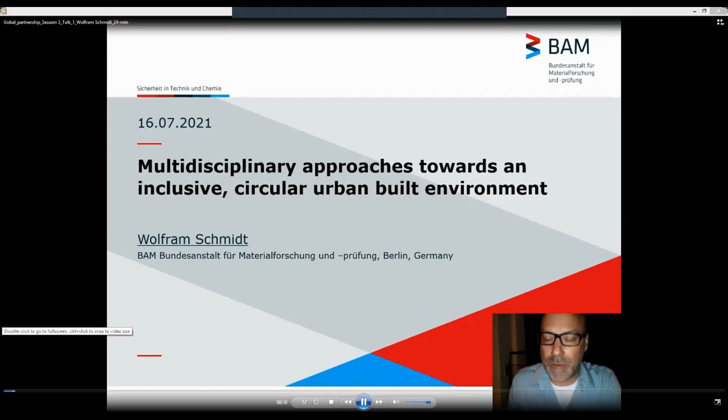Welcome everybody to this talk about multidisciplinary approaches toward an inclusive circular urban built environment. My name is Wolfram Schmidt. I work at BAM in Berlin, Germany, and I would like to thank the organizers for having me at this conference, and I would also like to apologize that I cannot be here with you live, but there was a clash of duties. I would like to encourage you to get in contact with me afterwards if you have discussion items or questions.

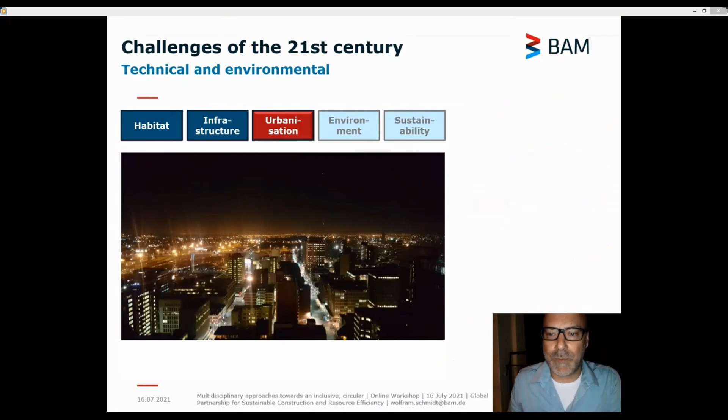Without further ado, I would like to come to the human and societal crisis that we face in the next century, which is war, hunger, health, migration. But beyond these societal challenges, we have more technical or environmental challenges like habitat, infrastructure, urbanization, environment, and sustainability. If we take a closer look at that, we can see that the construction industry has a very heavy contribution to these challenges.

The construction industry is growing, so this contribution will be bigger and bigger. And already today, according to the United Nations Environment Programme, the carbon emissions and also the energy demand of the built environment make out about 40% of the global values. And the construction industry itself contributes already with about 10% to that.

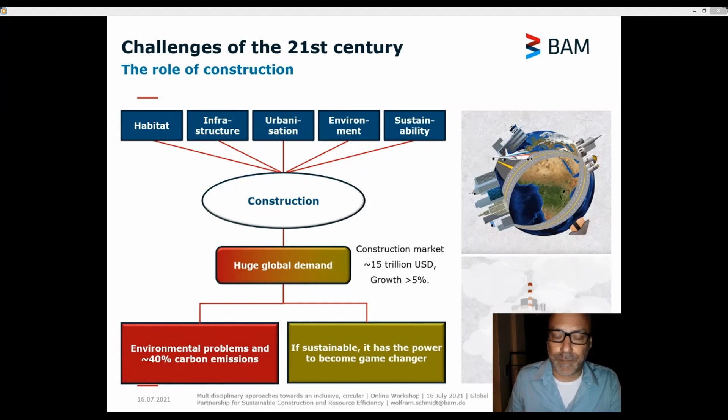But when there is such a huge global demand, we can certainly consider it as a challenge, but we can also consider it as a potential, because if we just make it more sustainable, we can create great leverage towards a betterment. The construction industry can really become a game changer if only we can create sustainable construction where the environment is protected, where more climate-friendly materials are being used, and where this also creates markets.

Because when people can use sustainable construction to create livelihoods, automatically those human and societal crises I mentioned at the beginning, like war, hunger, health, and migration, become better. And therefore urbanization and construction in general can contribute also to those more societal and human challenges we face.

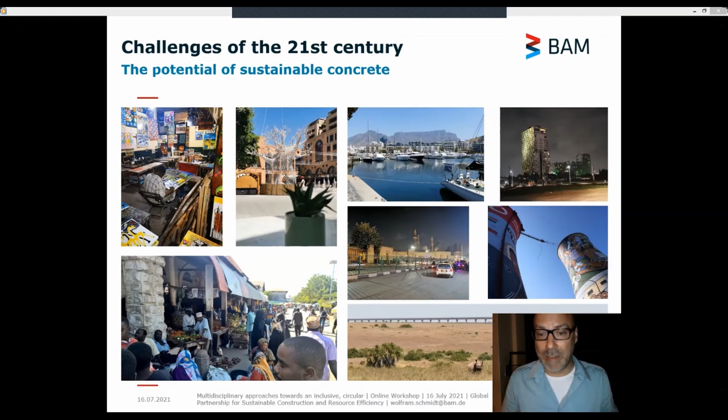That means if we build something, a construction that automatically interacts with the environment and vice versa, that is well known, but we also have to consider that construction also interacts with how societies behave, and that is also a mutual effect. Urbanization, cities, are the places where all this comes together: environment, societies, construction, and therefore urbanization processes can really become critical for the future of humanity.

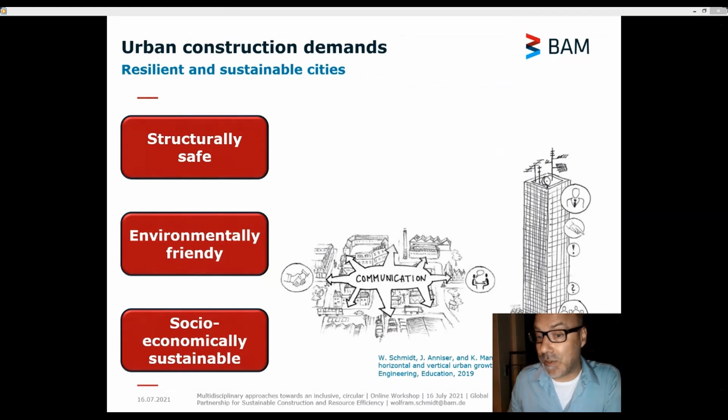We have to make sure that our future cities are not only structurally safe. We also have to make sure they are environmentally friendly, but particularly we have to also consider that they are socio-economically sustainable, that cities are built for the people who live in these cities, which is not the case today, and where we have to change our mindset. Because if we just fail one of these items, we fail to have a sustainable urban structure.

Much of how potentials and challenges can unfold in urban development depends on whether the city already exists at a high population density, or whether it is a low density region which can still develop over the course of the next decades. I'm not getting into the details of that figure—you can read it if you like in this publication—but it seems that a high density situation and a low density situation seem to be very crucial for how cities evolve in the future and how people perceive their cities.

I would like to give you that example of a workshop I did with children in a very neglected settlement in Nairobi, in a very urban environment, Mukuru. And I asked the children how they dream the city of the future, and they said they want to have more space, more green, more animals, which is really a rural environment.

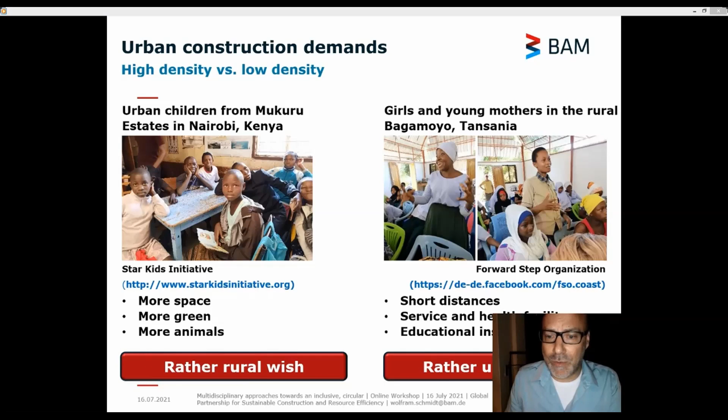And then I did the same exercise with girls and young mothers in a place which is very rural in Bagamoyo in Tanzania. Here the answers were short distances to services and health facilities, good access to educational institutions, which is rather the dream of an urban environment. So that is a very clear indicator that we really have to take care that we do not over-urbanize those already urbanized regions that exist, but rather invest into the medium and smaller cities, which also help developing the rural environment. Cities really have to grow to the benefit of the people who live in those cities.

You've seen that my examples were all coming from Africa for a good reason. The urban population all over the world is growing, but in sub-Saharan Africa, the urban population is growing dramatically strong, much more than in the rest of the world, and therefore Africa has a very specific role if we think about urbanization processes. 13 out of the 20 most populated cities in the future will be on the African continent.

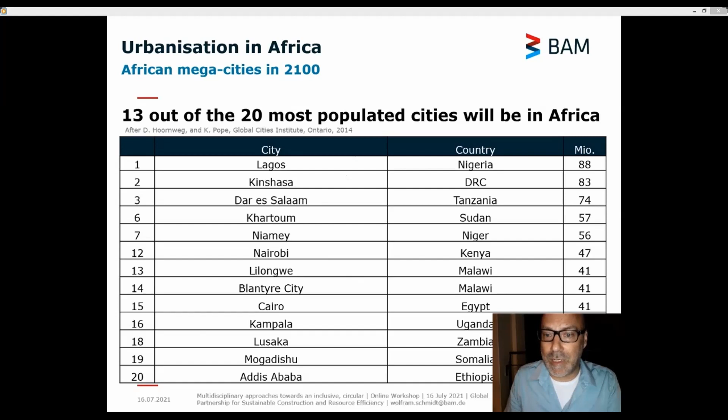Of dimensions which we have never seen before, like Lagos, 88 million inhabitants. That's incredible. And what is so interesting about that is that of those cities that will have been built by the year 2050, only 20% have been built already today, which means over the course of only the next 30 years, 80% of these cities will have to be built in the most sustainable way that we can imagine.

So we have to really stop discussing this: if this is done, then this will happen, and waste our time. We have to bring those players who really want this sustainable change together and act now. And even if we only find the second best solution, it's still better if we find it today than to wait another 30 years to continue repeating the mistakes of the past and then start with the very best solution.

So we really have to act now, because we only have 30 years time. And we have to see the potentials of Africa.

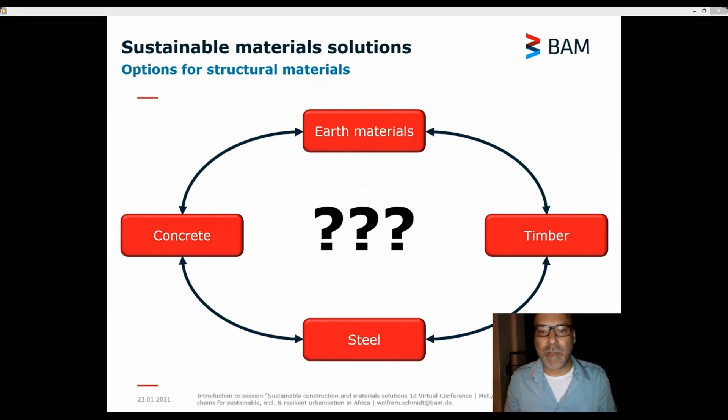But that certainly starts with the materials. There are a lot of structural materials that can be used: earthen materials, timber, steel, concrete, for example. What is the best? Timber is often considered the healing material, and timber is very beautiful, and if a sustainable timber supply is chosen, it can really be a carbon sink. But unfortunately, in most parts of the world the timber supply is not from sustainable sources, and in many parts of Africa, deforestation has really caused dramatic environmental challenges. So it has to be taken very carefully.

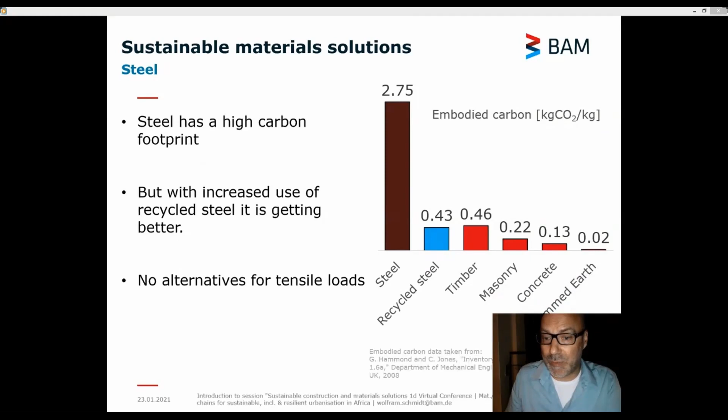Steel is known to have a very high carbon footprint, but there are tensile loads, and steel is the best material for that, so we cannot entirely avoid it. If we take a look at recycled steel, for example, the carbon footprint becomes much better. Earth materials are remarkably low in their carbon footprint, as long as we do not use cement, but unfortunately earth materials require maintenance, and therefore people use cement as an addition, and then all of a sudden the amount of cement becomes very high for a very low strength. Then we completely underuse this high carbon impact material, cement, and it stops being very sustainable. So this also has to be considered a critical aspect.

But in Africa particularly, concrete is extremely expensive. Here I made this calculation. In 2009 it was most dramatic when I found that an average income earner in Germany has to work half a day to purchase a ton of cement. But in the Democratic Republic of Congo, an average income earner had to work 323 days to purchase the same ton of cement. That is really a huge number.

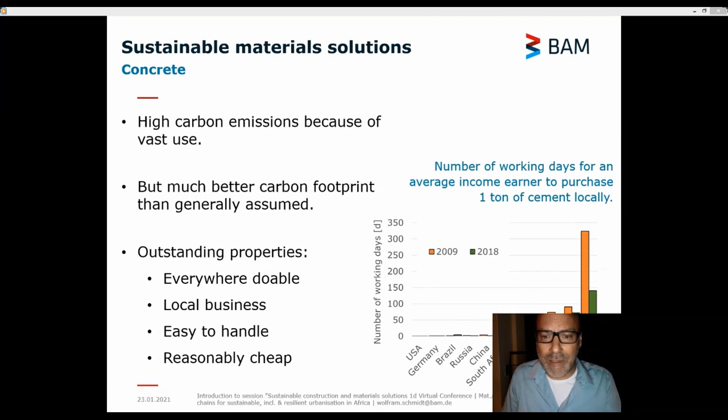So concrete is also a price question, especially where the supply chains are not very good. With respect to materials to be used, there is no single answer, and definitively there won't be a marvel solution. We have to live with what we have, but we have to consider good engineering, which requires that we use materials according to the load case.

When there is tension, we need steel. If there is flexure, we can use timber or reinforced concrete, and for compressive loads, normal forces, we use concrete or earth materials depending on the load.

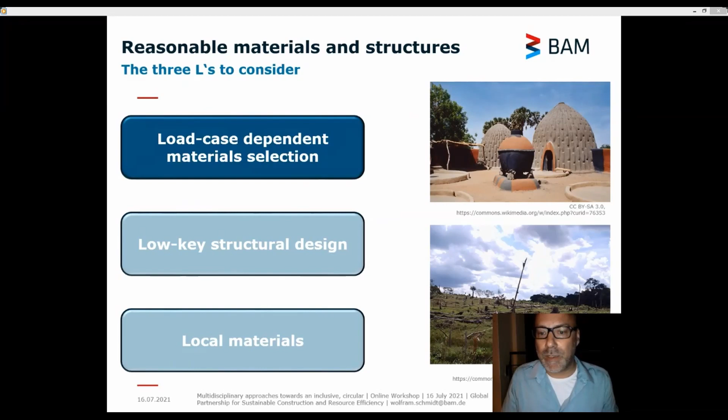We have to build more hybrid, and we also have to keep it low-key. Building a kilometer high in the desert doesn't make a lot of sense, because if we stack story upon story, the lower stories always have to carry the sum of the stories upon them, and that requires very huge cross-sections for the vertical elements. In other words, if I want to stack 50 stories upon each other, I require 25.5 times more material than if I would take these stories and just disperse them horizontally.

So we don't have to discuss about saving 5 or 10% of cement if we waste our concrete here. Low-key construction, keeping the span width low, sometimes a single column can save us a lot of material. Eventually it is important, like for food, to use local materials to become sustainable. So if we take a look at load case, low-key, local, we all start with an L. Let's call that the 3L principle for good engineering and good urban construction.

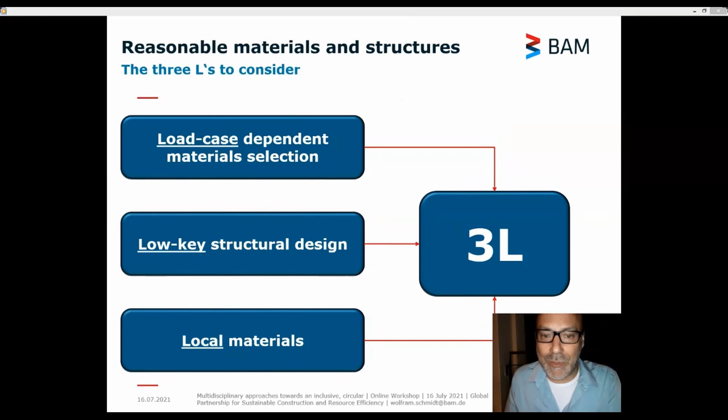I would like to give you an example how that can work, based on concrete, because we can discuss about materials, but concrete is the only material that is sufficiently available on Earth to build our structures, infrastructures, underground structures, and so on. So concrete is there for urban construction. It's also a good material because we have a lot of vertical loads, concrete is good in that, and if we keep the construction heights low-key, it's really a good choice.

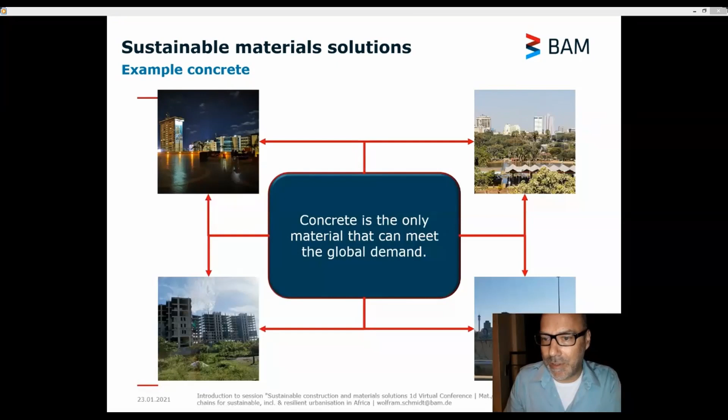How can we make it more sustainable from the materials perspective? We have to reduce cement and replace it with supplementary cementitious materials which are more sustainable, and we have to make full use of cement as a binder by reducing the water-cement ratio and probably using chemical admixtures to support that.

And here in Africa we find local materials. Cement replacements can be based also on agricultural wastes, because agriculture is a future business in Africa, like maize cobs, rice husk, sugarcane bagasse, or cassava peels. And also for the chemicals, we can use bio-based chemicals, which can help replace petrol-based chemicals like gums or starch and so on. An example I would like to highlight here is cassava.

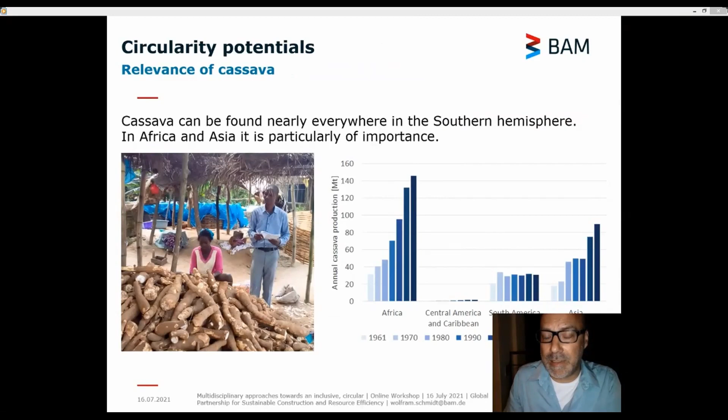Cassava is a food that feeds like 500 million inhabitants in the world. In Africa it's particularly important, and it has been growing in production over the course of the last 60 years, and it will continue to grow because it also grows on marginal soils.

Today cassava is being harvested. After that it's peeled, and the peels still contain a lot of starch adhered to them, and afterwards the inner part of the tuber is converted into a food product, quite delicious. For example, if you travel to West Africa, you should try fufu, which is made of cassava. But then the rest of this plant is not digestible for animals, so what happens is that people dump it away and consider it a waste.

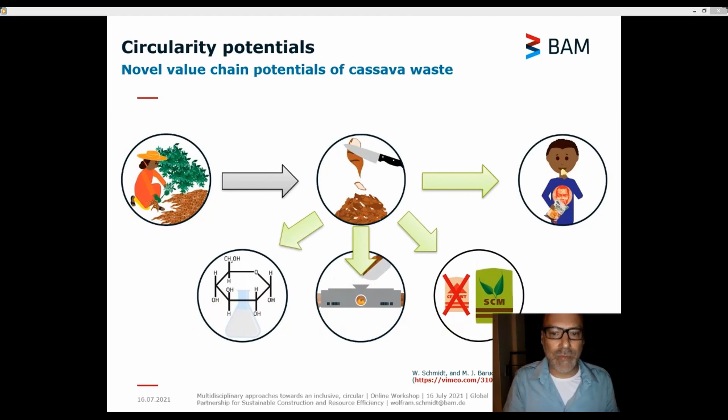But if you consider it as a resource, it qualifies to produce a water reducer for concrete. It qualifies to be an energy producer, and after burning it, the ashes qualify as a cement replacement. That's really remarkable, because before there was no value in it, and now you can create a value chain in the chemical industry as well as in the construction materials industry without competing. That is the most remarkable thing in it.

So there's a tremendous growth potential, and 60% of the global arable land areas which are not yet used are on the African continent, which is another huge growth potential. All of a sudden we talk about 15, 20, 25% of replacement possibilities, and then we are even higher than the ratios that can be replaced by fly ash or ground granulated blast furnace slag, for example, which are established in industrialized countries.

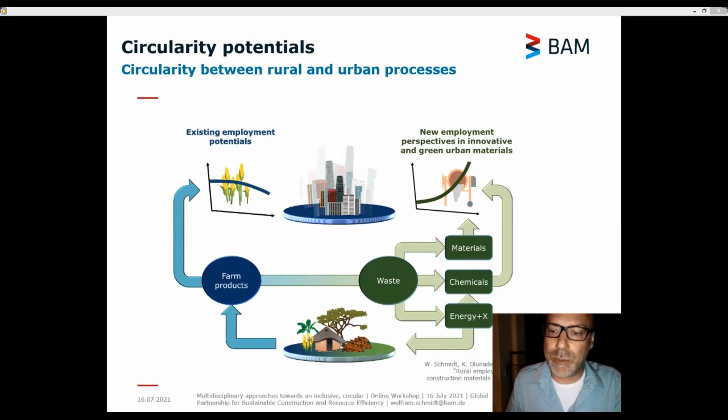So the farmers in the future can not only deliver farm products to the cities, but also use their wastes to convert them to materials, chemicals, and energy. That creates new employment perspectives in urban development. And with urban growth and urban construction, value also flows back into the villages, where it can contribute to rural development. Let me show you quickly how that works.

If we take the agricultural wastes, the residues go into a wet process where we can obtain chemical admixtures. The residues of that process get into a pyrolysis where we can obtain chemical precursors, which can go into the asphalt industry, for example, or sealants. And the energy that is produced from here, carbon-free at the moment, can be used to fire a brick process.

The residues, the biochar from the pyrolysis, can be added to the brick production as an internal fuel. And then from the kiln you do not only obtain the bricks, but you also obtain a pozzolanic ash. With the chemical admixtures that help reduce the water content, and with the pozzolanic ash that helps reducing the Portland cement clinker content in concrete, we can really create green urban construction materials.

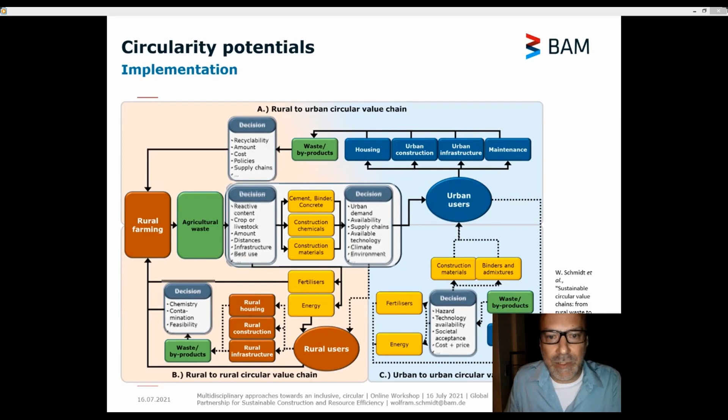Certainly the decision trees here and the process chains are very complicated. I'm not getting into the details of that figure, but I would like to highlight that in between there are always decisions, and these decisions have to be made by human beings. That is the important part of it.

The decision makers in these urban processes, and the decision process to create construction materials, value chains and supply chains, they have to work hand in hand. They cannot work as a standalone person who's just an engineer or just an investor or just an architect. We have to work together, communicate with the different disciplines, see the different perspectives as well, and bring them together.

This human factor is so important. We always believe that technology will save us. We dream about a brave new world where robots take over construction techniques, where robots even take over thinking and calculation, and the human aspect in this process becomes marginal. But the reality is, it's not like that.

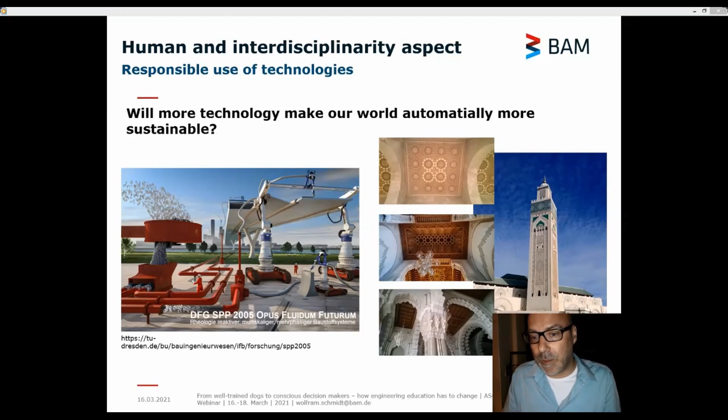That was the overwhelming moment, which is probably more sustainable at the end of the day than all the efficiency of a robot. And this, in combination with standards, becomes a little bit dangerous, technology and standards, because standards are a little bit like medicine. I'm not at all against them, but you have to use them in the right dosage, because if we overdose, like in medicine, they become poisonous.

And the problem is you always look at the price, so there's no driving force to outperform the standard, and therefore a standard becomes nothing but the certificate of officially approved mediocrity. And mediocrity is the last thing that we require to become more sustainable.

So technology is good, standardization is also good, but we have to have a human being in between to balance these things, to make sure that technology and standardization serve society, humanity, and sustainability.

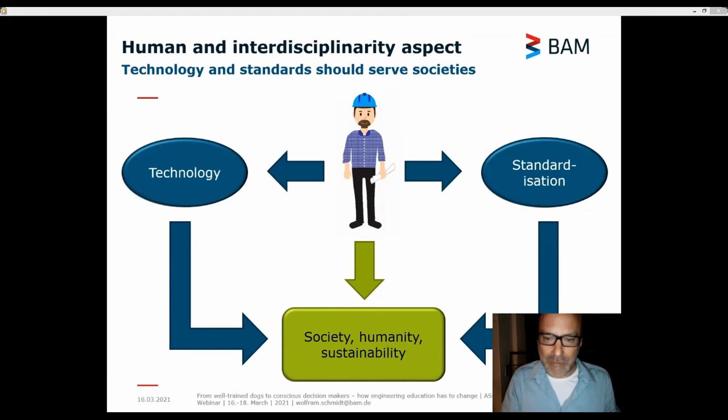And right in front of the entrance of the church on that campus, hell broke free, because underground human beings were stacked in their own feces, hundreds of them, waiting until the next ship docks. And the human beings would be forced through the door of no return to enter the ship, where they either had a destiny where they died in the ocean, or where they became slaves for the next and the second next generation. And the consequences of this structure, which was built very efficiently, optimized for efficiency—

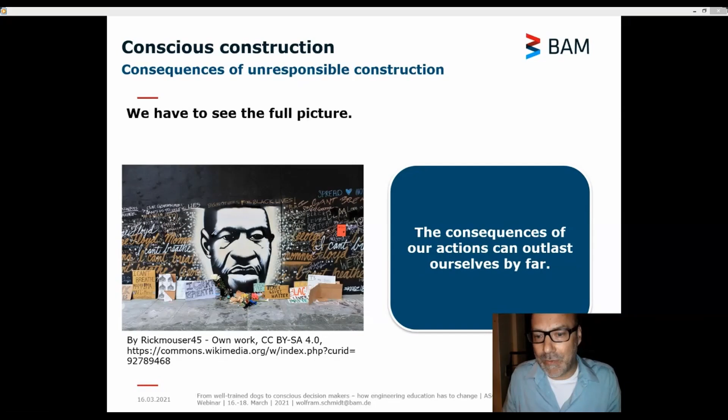it was built according to the state-of-the-art technology at the time, according to the standards that applied. But still, the implications of building that structure still last until today. So we always have to see the full picture. We have to consider that the consequences of our actions can outlast our own lives by far. And with that mindset, we can start to think about becoming more sustainable.

And the Falconers Consortium—it's a female academic leadership network for conscious engineering and science towards sustainable urbanization. I'm happy to be part of it, even though I'm not female, but I think that's a tremendous network that wants to look at urban processes from many different disciplines, and from a falcon's perspective, from the top, so where we can see the holistic picture, but at the same time have a sharp eye on the details. I think that's very important for sustainable urban construction.

So what is important is that we have to stop being appliers of technology. We have to become conscious engineers. If we work all together, hand in hand, then we have the power to change the urban environment for the better. But that requires a different way of education, also of the next generations, who really have to stop being technicians only, but have to become conscious.

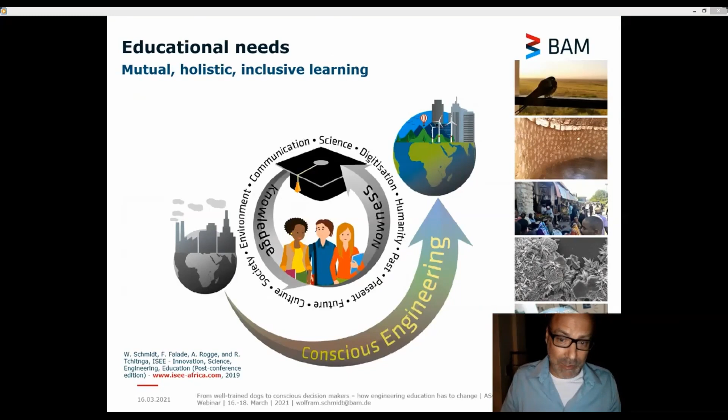That means they have to be taught the beauty of nature, history, markets, the social behavior of human beings, the microscale as well as the macroscale. Only then can we learn together and grow together.

Therefore, it's important that decisions for the future should not only be made by today's decision makers. Today's decision makers have to mentor the next generations to become more sustainable future decision makers. And this does not apply only to students and school children, but also to the youngest. We also have to listen very carefully to the youngest, to learn from them, to make our decisions already now for the future of the next generations.

And if we take that into account, then we have a bright future and we can build urban structures and urban environments much more sustainably. And with that, I would like to thank you very much for your kind attention.

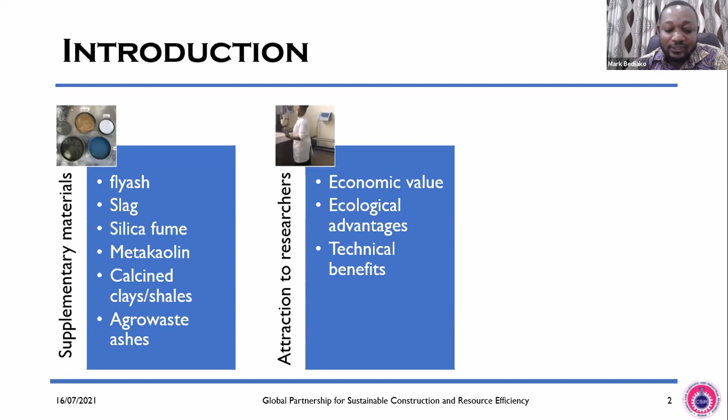By way of introduction, supplementary materials such as fly ash, slag, silica fume, metakaolin, calcined clays, and some agro-waste materials are attracting attention within the research community because they have economic value, ecological advantages, and technical benefits. The economic value is because literature has found that they reduce the clinker factor. Ecologically, they also reduce the carbon footprint. And technically, they're known to enhance the strength and transport properties of concrete.

So the problem for this study, I have categorized into two. I'm looking at it from the global perspective, that is the general problem, and then from the Ghanaian perspective, which is a local problem.

With the global problem, let me re-emphasize that population growth and urbanization is an issue in the world. The United Nations has stated that population by 2050 will reach about 10 billion. Currently we are about 7 billion, and 66% of people within the world will be urbanized. Africa and Asia are being highlighted as places that will have a higher share of population density. Aside from that, many African and Asian countries will see higher economic growth. But the point is that all these things will be associated with overconsumption of materials.

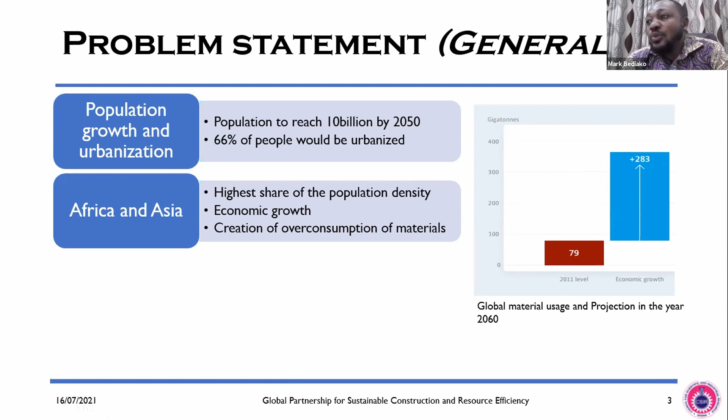This is a graph I picked from a United Nations document. They say that by 2060, using 2011 levels, material consumption will increase to about 400 gigatons - an increase of 283 gigatons as a result of economic growth. People will be building infrastructure, roadworks, concrete roads, and many things. So the concrete industry is going to play a major role because many countries are going to develop, and we're going to see higher consumption of non-metallic materials like sand and coarse aggregates.

When there is higher consumption of materials, we have to keep in mind that there's also higher embodied carbon and energy release. Concrete consumption is responsible for about 9% of total greenhouse gas emissions, and interestingly, cement generates about 96% of this 9%. So it's very important to look at the cement we use and see how best we can reduce its carbon footprint.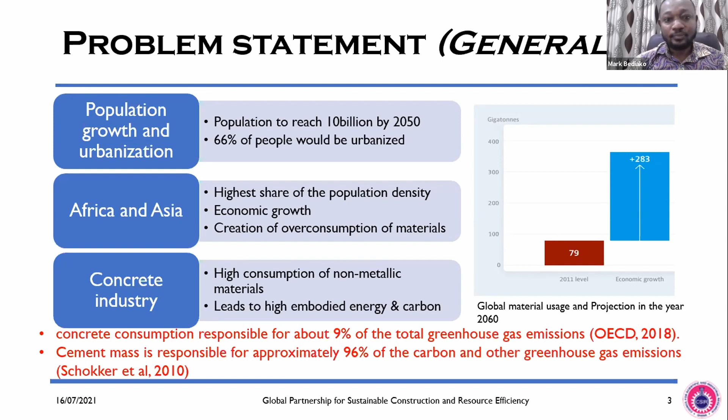So let me come to the local problem in Ghana. Ghana is having a booming economy of late, and within African settings, I think we are doing not bad - we are having a lot of construction activities. Recently our vice president made us aware that we're going to do a lot of concrete roads instead of asphalt roads, and railways we are building. All this construction is using cement.

The point is that we are using almost $400 million to import clinker and gypsum to the country. We don't produce clinker because we don't have very quality limestone in the country. I gathered this information from 2000 to 2021. It's very interesting - this is the trend of cement prices over the years. From 2000 to 2021, the price of cement per 50 kilogram in Ghana has increased by 1,678%. That is very, very huge.

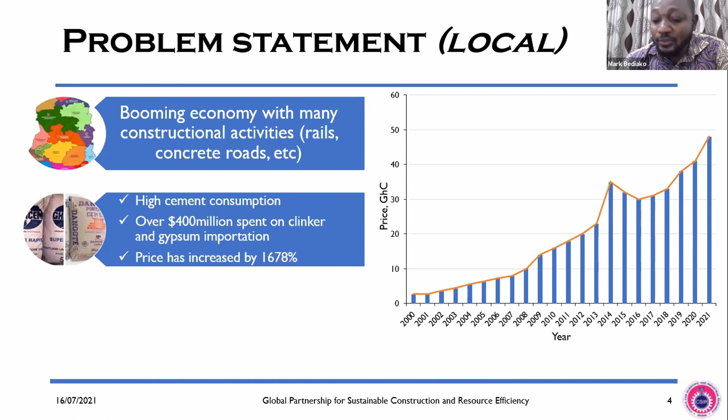As a Ghanaian, as a researcher, this high cost of cement is a local problem, and it calls for urgent attention from us in the research community. It increased at a rate of 6%. From hindsight, we can see that cement consumption is predicted to reach about 10 million tons - currently we are consuming about 7 million tons. So by 2025 we're going to increase. There's an urgent need for us to do something about this. So that is the local problem in Ghana.

So what is motivating me to go into this study? Of course, we have a UN common goal that all member states should look at the rising greenhouse gas within the globe. I'm also motivated to look at sustainable concrete through the use of clay pozzolan in Ghana. Prof. Otieno made something interesting to me - that we need to validate research work. People have done research on clay pozzolan, but using local material in Ghana, we should validate it. I like that statement.

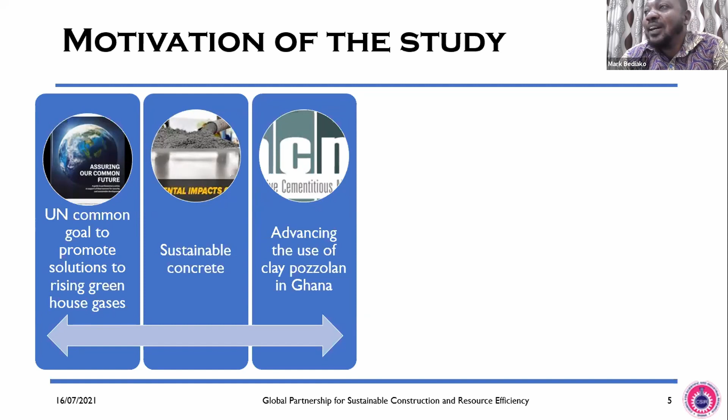The objective of this study is to look at processed Ghanaian low-grade calcined clay as a cement substitute for concrete. To achieve this, I looked at the mechanical properties, including compressive and flexural strength, then the transport properties, looking at suction and the rapid chloride permeability test, and the embodied carbon of the various formulated mixes.

These are the materials that were used: Portland cement in a grade of 42.5.

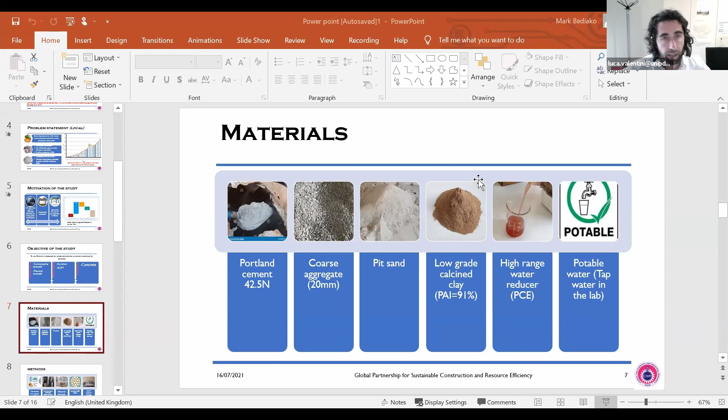Yes. Do you see my screen now? We do, yes. Okay, thank you very much, Luca, for the introduction.

Also, I want to thank the organizers of this seminar for inviting me here to share our experiences in introducing a novel cement, especially in the context of climate change mitigation.

Myself, I'm a professor and director of a research center at the Central University of Las Villas in Cuba, but also work with the Swiss-based company Eco Solutions in Switzerland, providing advisory service to the cement industry. I'm also happen to chair the RILEM technical committee on calcined clays and supplementary cementitious materials. I have more than 12 years of collaboration with Professor Karen Scrivener in Lausanne in studying calcined clays as supplementary cementitious materials. In the last few years, this group has been integrated also with several Indian partners, the Indian Institute of Technology in Delhi and Madras, and we have a global team now that is endeavoring to introduce this cement.

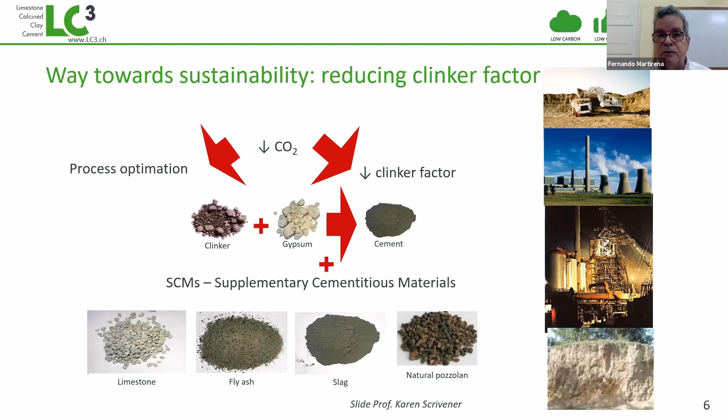We also have limestone and natural pozzolans. But what we're seeing in the last few years is that there's a plateau in the clinker substitution rate. On one side, if you increase clinker substitution with these normally used pozzolans, you compromise strength, especially early age strength, and that's bad for concrete. But the most important thing is that the availability of many of these supplementary cementitious materials is not in the same order of magnitude as Portland cement production in a year, as you can see here.

For instance, slag and fly ash, which are the most commonly used supplementary cementitious materials, their availability would be something like, the highest would be 15%. And even in the case of fly ash, we're using only a small part of the fly ash produced in the world in coal power plants. Therefore, the only materials that are widely available and could be suitable supplementary cementitious materials are limestone and calcined clay.

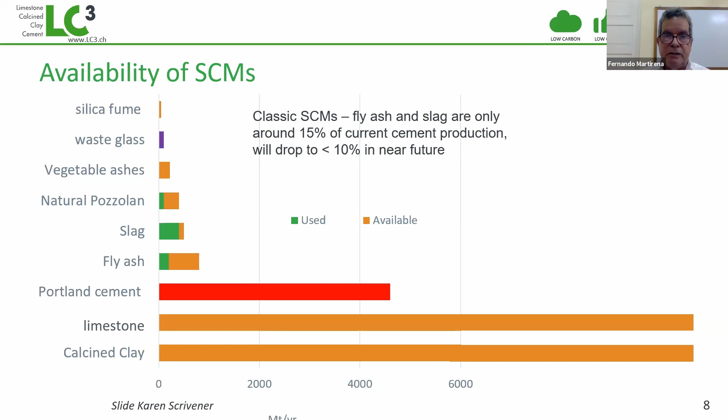In the case of Africa, because of the geological history of Africa, there's a scarcity of limestone. Therefore, you barely see clinker factories in Africa, except in a few countries where you have some reserves of limestone. Africa is mainly a continent importing clinker from elsewhere, especially from Europe. And that makes cement very, very expensive because you have to pay for transportation, and also you have the external dependency on the market.

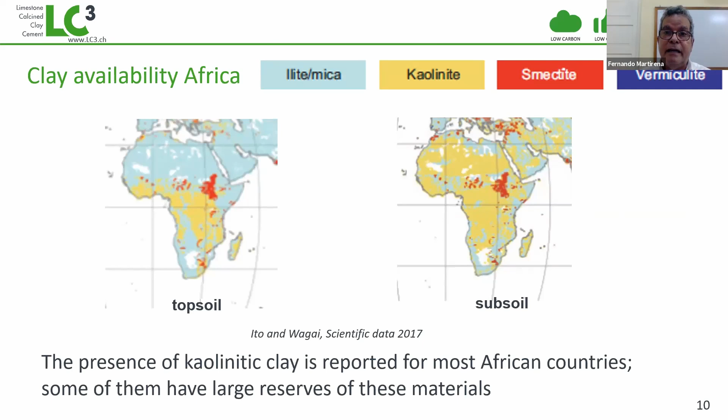However, if you look at the geology of Africa, you realize that it's full of clay everywhere. You go to every country, subsoil, topsoil, and you find clays, especially the good one, which is kaolinite clay, shown in yellow here. So it's a very, very interesting alternative for countries, and for African countries there's a very good opportunity. I was pleased to see a presentation before me about calcined clay in Ghana, but you will see here that there are many other countries using this so far.

So the challenges for most African countries are, first of all, to reduce clinker content in cement due to the high cost of imports, but also due to environmental reasons, if you want to really reduce carbon emissions. To do so, you have to find locally available supplementary cementitious materials. In this regard, I want to make the case that calcined clay would be a very interesting material for Africa, which would also have the impact of reducing transportation, because you can set the plant near the source of the supplementary cementitious material. And this is where limestone calcined clay cement plays a role.

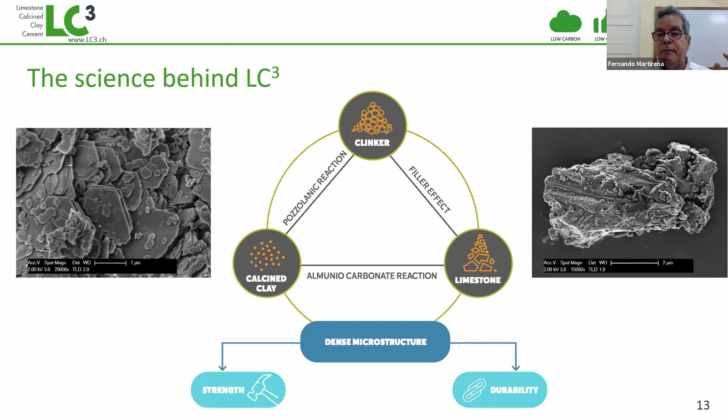If you compare concrete, for instance, that was presented before, only with calcine clay, you can even extend further the clinker substitution by adding limestone, and that will not compromise the strength of the system.

In terms of production, Africa needs to face industrial production in calcination units, existing cement plants, new grinders, etc. But we have also explored, and implemented in Cuba and other countries, local production using crushed fire clay bricks as a source of calcine clay. That's very interesting, especially for popular development projects in villages and everywhere.

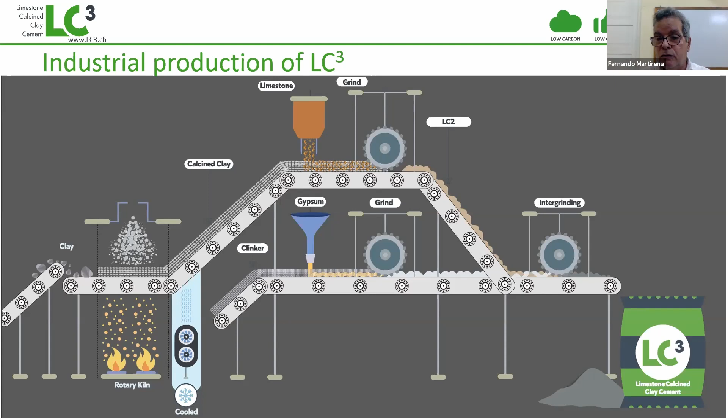Here is the scheme of this LC3 production. Basically, you take suitable clay, fire it at 800 degrees Celsius, then you can either blend it with clinker, gypsum, and limestone to make the cement itself, or you can produce a mineral addition, which we call LC2, by grinding it and blending it with limestone. Those are very interesting choices for production.

Of course, you need to have this suitable clay. You need to process this clay, where you have to go to the brick industry to get expertise. And then you calcine the clay and do the whole process of blending until you use it in concrete.

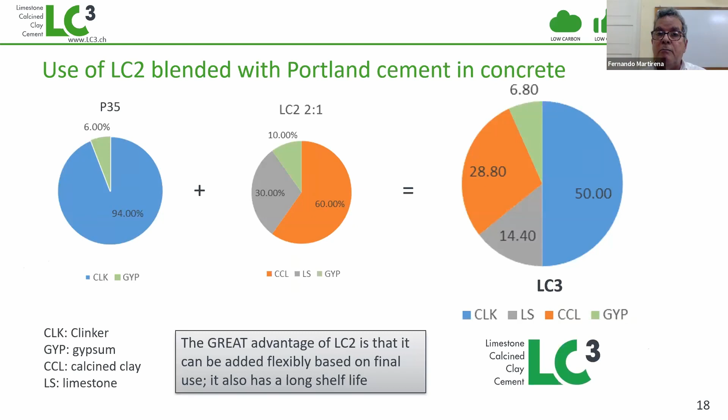We have accumulated some industrial experience producing what we call LC2, because here we have a mineral addition that has calcined clay, limestone, and gypsum, so it's properly sulfated. You can use it very flexibly by blending this with a cement that is available in the market. And at the level of the mixer, you have a composition of the binder similar to the composition of LC3.

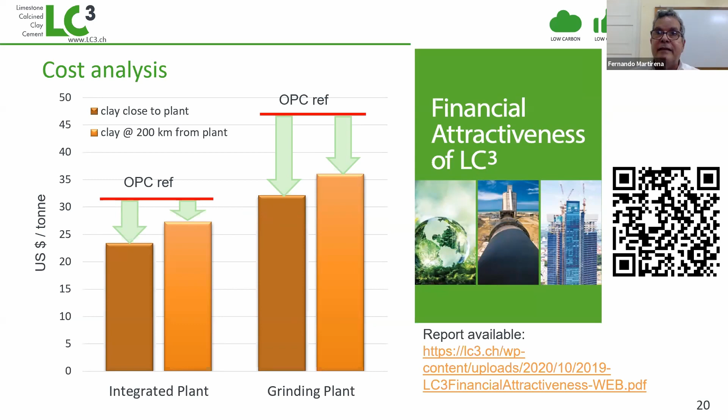In terms of cost, I encourage you to download this free report made by the company Cementis on the feasibility and financial attractiveness of LC3, where they studied different scenarios - different distances from the clay quarry, different production scenarios - and in every scenario, the cost of LC3 is at least 10% lower than the cost of traditional cement produced there.

The good news, especially for African countries which, like Cuba, follow the EN standards, is that TC51 on cement has recently released a new standard, still to be ratified individually in each EU country. This standard enables production of a CEM2, a Portland composite cement, with 50% clinker and a combination of up to 50% other materials, including calcined clay and limestone. So LC3 is already present in its original composition in the European standards, and that's very good news.

In terms of CO2, remember 60% of the carbon emissions associated with cement production are associated with the decarbonation of limestone, which is 80% of clinker raw materials. So if you replace clinker with any material, you're automatically reducing carbon emissions. Of course, here we are calcining the material, so we have some collateral CO2 emissions associated with the fuel.

When you check this and make this analysis, taking the Global Cement and Concrete Association benchmark figures for a fully optimized cement, and compare the CO2 saved - compared to CEM I, we're able to reduce 40% of the carbon emissions compared to a CEM2, and we can reduce between 18 and 25%. We have to bear in mind that we compare to CEM I, because we're achieving the same strength results as CEM I, meaning this is a huge contribution in terms of impact on CO2.

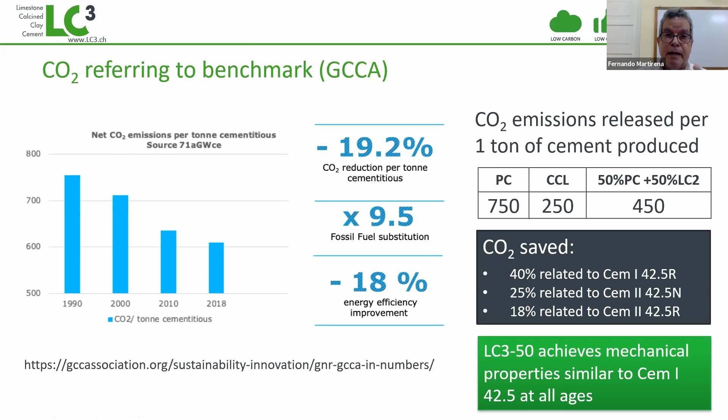That also brings some opportunities for African countries. The cost of a ton of CO2 in the global market, especially in Europe, right now is around 50 euros - slightly higher than the average cost of 1 ton of cement - and it could even go higher in the forthcoming years.

So incentives associated with this could be a very good driver for introducing these kinds of cements in Africa, and you should bear this in mind.

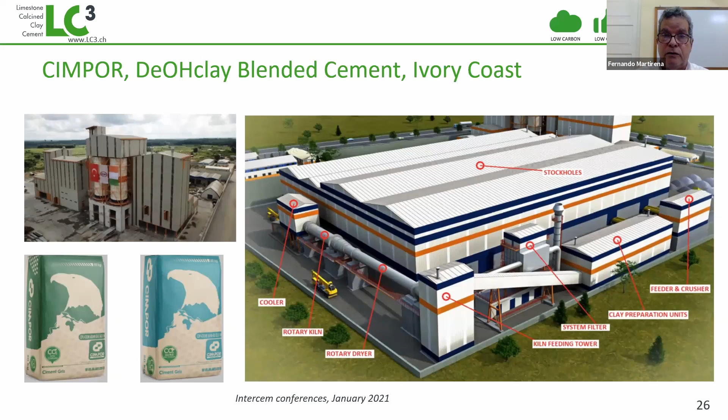You guys in Africa already have this in place. I'm presenting here information from the presentation of the company CIMPOR in January this year in Ivory Coast, where they already have a plant in full operation, producing 2,500 tons of cement per day. There's a new one by the same company planned to open in Cameroon, and there are some investors now exploring the market in Ghana. So I can anticipate that Africa is going to be the core of this LC3 technology in the forthcoming years, and that's very good news for you.

From our team, we offer technical assistance, our expertise. We have a technology resource center in India. We have another one here in Cuba. We're working with the west part of Africa. India is working with the east part of Africa. So we are available. We have developed a full protocol to assist companies in the introduction of LC3, with standardized testing and everything, so we can really make this happen very quickly.

For instance, we were there in Ivory Coast assisting the local company in introducing this. And I think that if Africa really wants to embrace this technology, you really have to create capacity for that. We have a pilot plant in Cuba where we do trial operations, fully sensor monitored, and we offer you all of these facilities in order to introduce the technology in Africa. With this, I'm coming to the end of my presentation.

As concluding remarks: Africa has to lower the clinker content of cement. You have the good material, good placement everywhere. LC3 cement is a good choice because you're having a strong cement which you can use in concrete, but only 50% clinker. There are already ongoing projects and a full plant in operation in Africa, and at least 2 more plants will start in the next 18 months. But you also need to create an LC3 Technology Resource Center in order to accompany the dissemination of the technology.

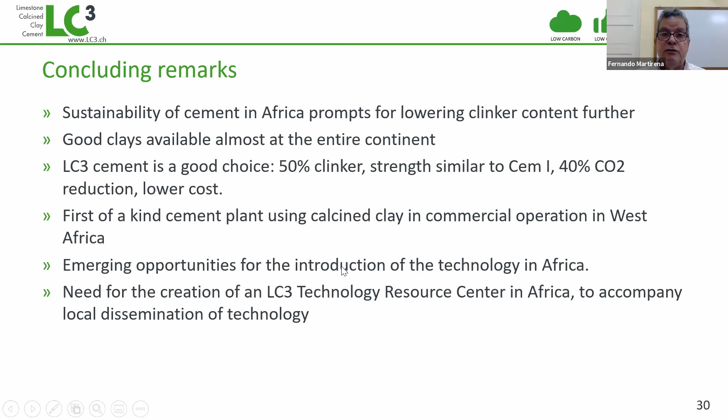Thank you again for your interest.

Thank you, Luca. It was really a pleasure to share with you my experience. Thank you. Thank you very much, Fernando.

I was actually going to ask you about Ivory Coast, because I remember this being told during one of the last offline conferences before COVID. So it's good that you updated us about this. There are a couple of questions from the audience, so if you can shortly elaborate on this.

The first one is: what are the differences in terms of engineering properties between LC3 and calcined clay cements, I guess, without limestone?

Well, actually, the problem with calcined clay cements, where you're using, let's say, 70% Portland cement, 30% calcined clay, is first of all you don't use the synergy between the limestone and calcined clay. It's very likely that if you lower the clinker content down to 50%, you get a much lower strength than if you do it by a combination of 30% calcined clay, 15% limestone -- a 2-to-1 ratio. That's the first thing.

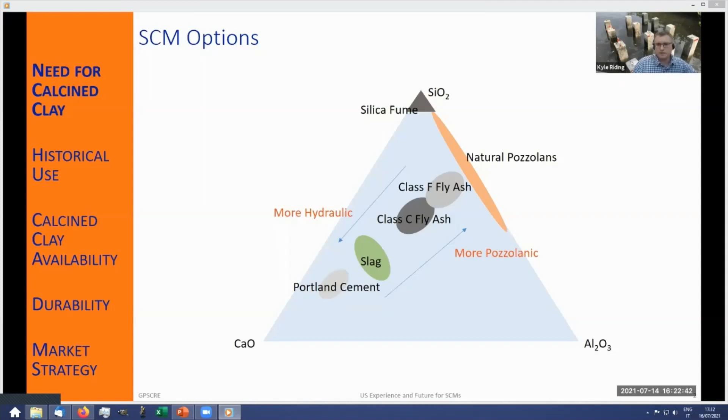So if we look at our options out there, we have materials such as calcined clays or kaolinite clays. These are clays that are heated up to dehydroxylate the kaolinite, which makes them reactive for use in concrete. Our other alternatives really aren't available in large quantities every year.

You might say, well, agricultural residue ash is available in decent quantities, we can at least try to use that. The real problem with some of these other options, like agricultural residue ashes, is the collection network—how do you develop a collection network from scratch?

You either need to have material pre-existing and collected for other purposes, or you need to start one from scratch. In that case, you have to get the material from farmers that value it as a fertilizer for next year's crops, so you have to pay them.

That raises the cost. You also have to bring it to a central location for processing, which takes energy and petrol, decreasing the sustainability of the material. Also, you have impurities in the materials, like phosphorus in corn stover, that need to be removed so they don't damage your concrete. That takes either a dilute acid treatment or water soaking to leach it out, which is expensive and reduces the viability of the material.

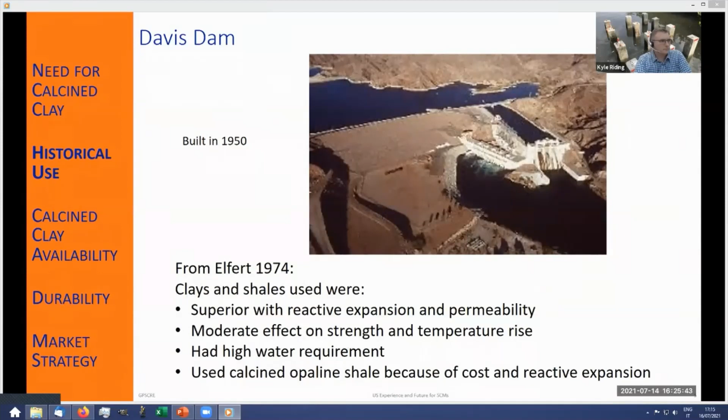So here's an example of hydration. You can see that the use of calcined opaline shale reduced the heat of hydration. It reduced thermal stresses and cracking in mass concrete dams, and was valued for that.

When they started looking at another material, fly ash, that came to supplant calcined clay for many decades that followed, in the 50s they actually compared its performance to the calcined materials to show it could give equivalent performance to the calcined shale. That gave people confidence that they could use this material to give as good a performance as the calcined materials, and this is how they justified the use of fly ash in the 1950s.

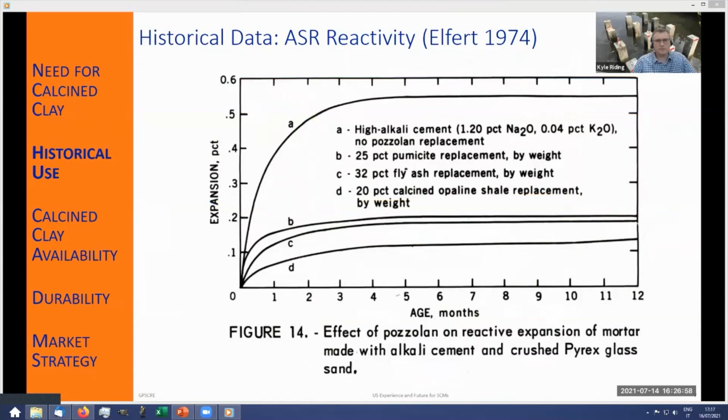It's ironic that it was justified by comparing it to calcined materials, because now when we're trying to reintroduce calcined materials back, we're comparing their performance to fly ash, the material people are now familiar with. Its ASR reactivity was really good, and better actually than fly ash in many cases. So really good performance from this material, and that's why it was originally used—because of performance, not sustainability.

Our use of fly ash really started to increase when the Hungry Horse Dam was made in Montana. It was available almost for free because it was just being landfilled from coal combustion. So people started to use fly ash not because of performance, although it did perform pretty well, but because it was available cheaply in massive amounts.

Until the 1960s, the nearest source of fly ash in the western U.S. was in Kansas City in the Midwest. As more coal plants got built out west, it became much more available and cheap. In the 1960s and 70s, coal plants were built in the Four Corners area and in Arizona, providing massive amounts of very low-cost fly ash.

People got addicted to low-cost material. It was not viewed as necessarily a premium material, it was viewed as a low-cost material, and that's how it was used. So the lesson is that economics will triumph over technical superiority almost in every case. It was economics that made calcined clay decrease in use, and it's going to take economics to make it come back. That's just the reality of markets in the United States and in many locations around the world.

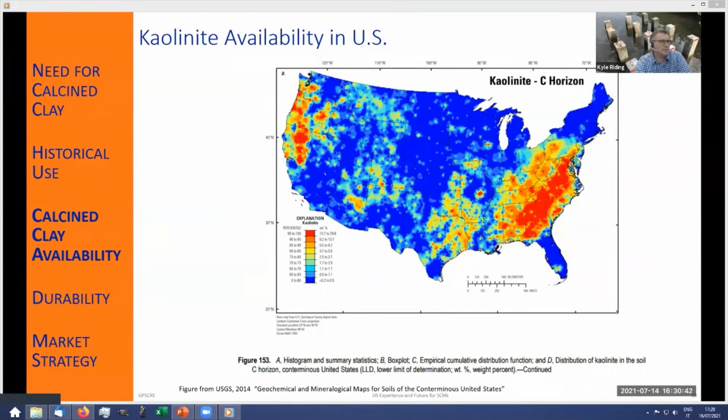In the United States, we have very high kaolin contents in the US Southeast, with high population density there as well. Where I live in Florida, there are very good deposits of kaolinitic clay in central Florida, especially along the fall line that runs through Alabama, Georgia, and South Carolina. 89% of kaolinitic clay in the United States is mined in Georgia, a lot of it near Macon, Georgia.

So we wanted to look at how we could bring back clay use for our region in Florida. A survey was performed of sources in Florida and Georgia, and we went to 9 mines and looked at over 20 different samples to calcine them and examine their strength and performance in actual mixtures. Based on that, we found that pretty much all of them would pass strength requirements for use in concrete in Florida.

We see this as a really good opportunity, this material is available locally and can be used. In many cases, material good enough for concrete is available as waste at other facilities. For instance, they use kaolinite clay to make part of your catalytic converter, in paints, and in paper coatings, which need high purity material. The material we need is found in the overburden of a lot of these mines.

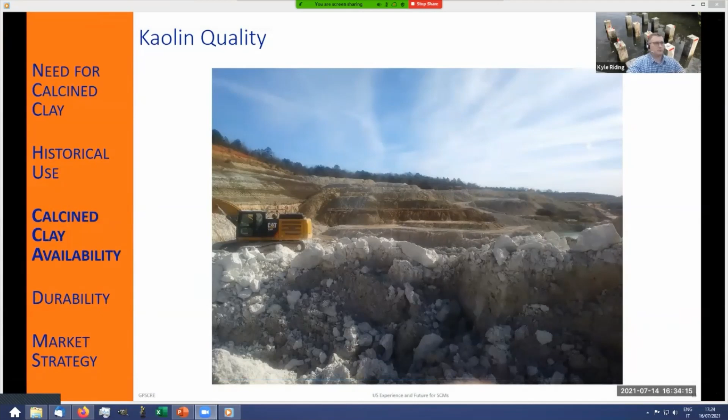Technology has changed, so re-examining our old ways of doing things and incorporating new technology is a way of producing sustainable development and providing today's solutions to our current problems—yesterday's solutions updated.

With our limestone calcined clay cement, we've examined it and you can get very good durability out of this material—sulfate attack durability, which was the original use of calcined clay for the Golden Gate Bridge. We get excellent durability, even better with an LC3 cement. Some materials with lower calcined clay or kaolinite content require technologies such as sulfating to improve performance, but our current tests show that does fix the problem. We're able to get good durability.

The local material we're producing here in Florida and Georgia gives improved durability from a chloride standpoint, meaning corrosion resistance. We're getting a performance improvement out of this calcined clay material when used with limestone cements—you get a synergistic reaction for durability. We see this with pretty much all the clays we investigated: an improvement in diffusion coefficients, meaning reduced chlorides and reduced corrosion. Even materials that aren't very finely ground show eventual improvement versus the Portland cement control.

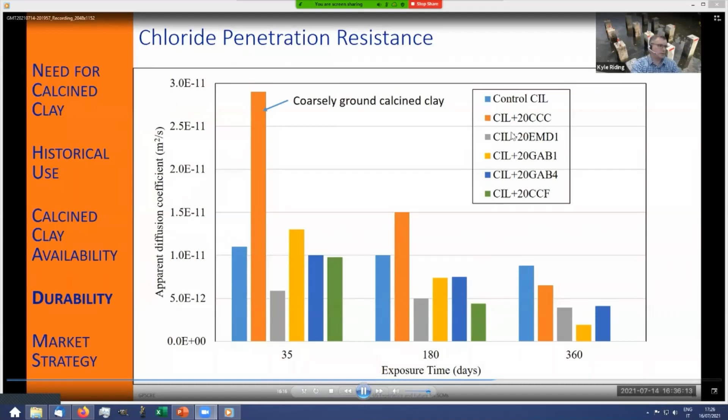But you do have to control your process—if you control your grinding and quality control of your materials, you'll make sure you get that performance from day one.

We've seen that this material is very durable and can give you good strength. The question then is, can you manufacture it economically? We have a material with calcined clay, especially used with finely ground limestone, whose performance is great—but can we manufacture it economically?

Really, your per-unit cost can be one-third to half that of Portland cement. But there are several things you have to overcome since you're changing the system. There are capital costs to adjust for—one is the cost of a kiln. If you already own a kiln making Portland cement that's not being used, that reduces your cost significantly. Otherwise, it may be a $30 to $50 million investment to build a new kiln.

If you're adapting an existing kiln, you may have to make modifications to control the oxygen content and the color. But we know how to do this—it's just a matter of making some simple modifications to the plant. So there's the capital cost.

There's also grinding. If you're going to make a cement with calcined clay and limestone, you have to look at your grinding capacity. Are you grinding limited? Are you going to co-grind it with the cement or grind it separately? These grinding mills and ball mills can be very expensive to incorporate.

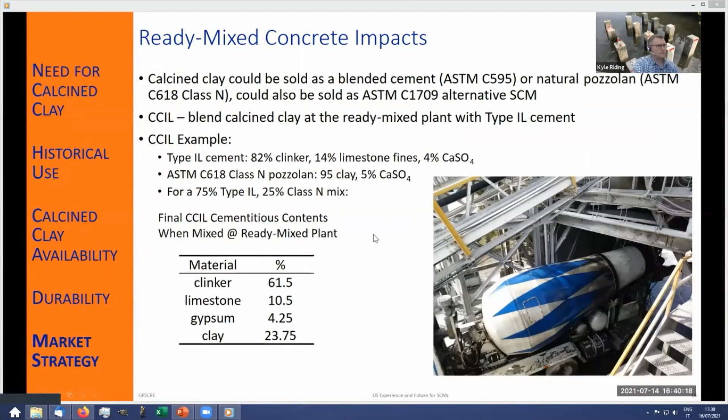So this is an example of material we've looked at, where we've looked at blending it separately at the ready mix plant. If you're going to also distribute it to ready mix operations, you have to look at how your customers are going to use it. In that case, it's going to tend to occupy a silo at the ready mix plant, the calcined clay or the LC3 blended cement product. So you either need to install a new silo, which is an additional friction or inertia you have to overcome, or you have to replace a silo currently being used for something else. So that's another inertial issue.

And then you may need mix designs for specialty cases that require you to blend your material with something else. So that's something else to consider. It's not just the production costs that create this inertia against new materials - you have distribution networks that are very hard to change. So that's one of the things we're facing.

So the path forward, for instance in the United States - and there are companies moving forward with calcined clay in the United States - is being able to familiarize contractors, reduce risk and project cost. It's a chicken or the egg problem. What's going to come first? The material getting built, or the plants getting built to make the material, or contractors using it?

Nobody's going to use it till the plants are built, and plants aren't going to build it until people are ready to use the material. So it takes basically these demonstration projects and small scale production to then do a demonstration project for a contractor, to build the demand in contractors so they're willing to use the material, before companies are going to invest money locally and that capital cost to build the plants to make the materials.

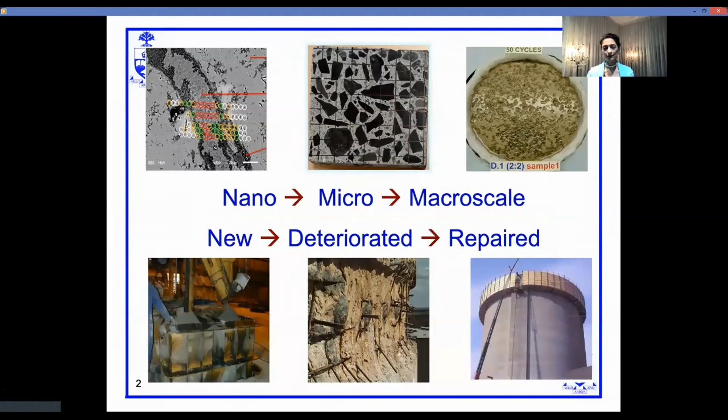My research is focused on the durability and sustainability of concrete from new materials, existing structures, and repaired structures, and the material characterization ranges from the nanoscale to the macro scale. From an education and research perspective, I incorporate the life cycle of infrastructure in my studies, ranging from the design phase, construction, use phase, and end of life.

In this talk, I'm going to be discussing the pedagogical pillars for sustainable infrastructure. I like to say that building and construction sits basically on a three-legged stool. There is a need for fundamental engineering design that accounts not only for innovation, but also aesthetics and flexibility of a design.

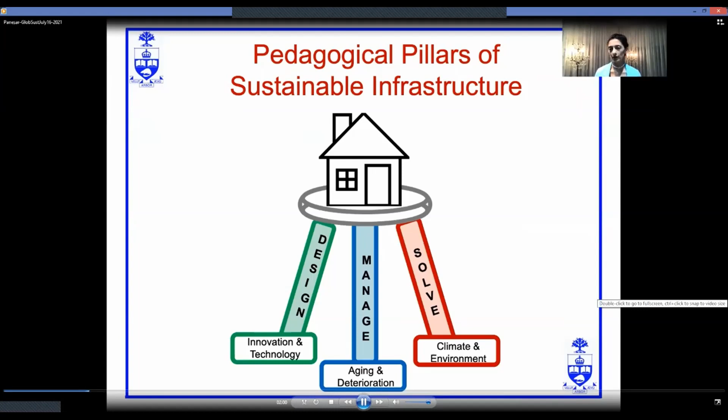The second pillar is management of existing infrastructure and structures, in particular dealing with the aging management and degradation that we see in concrete materials. And the third pillar is, I can be bold enough to say, to solve the climate crisis, or towards solving the climate crisis.

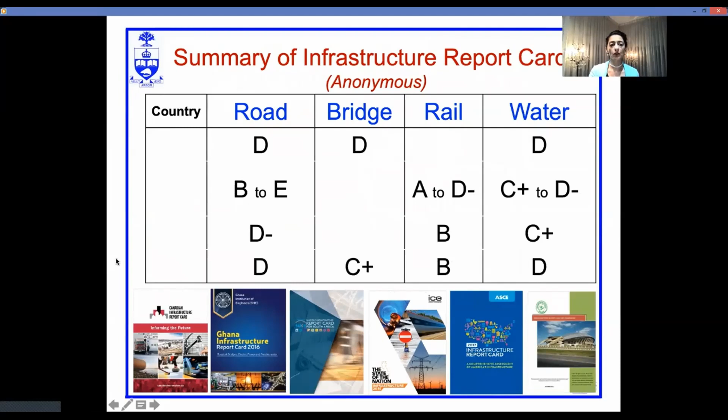At the same time, as we're under this pressure to design and manage effectively so that we continue to be able to use safe and reliable infrastructure, we're also—and by we, I mean the construction industry, the cement and concrete industry—under pressure to be more sustainable in our practices and our designs. Again, the writing is on the wall.

There is a number of very recent strategic roadmaps that emphasize or develop a framework for low carbon materials and technologies. The Canadian one is under development, so maybe the next time we speak I'll have more information on that one.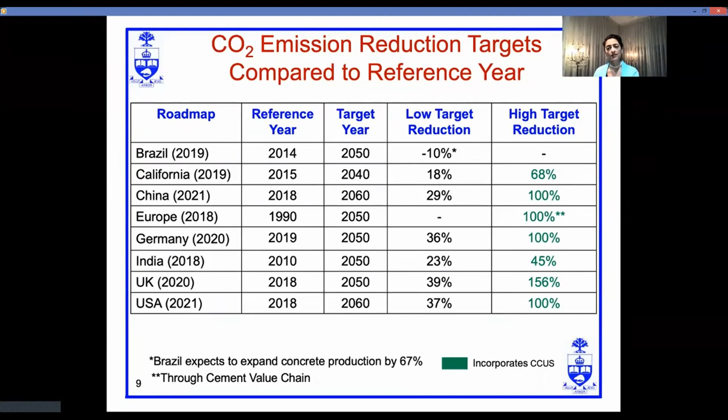One more observation is that the high target for reductions of CO2 emissions, highlighted in green here, in some cases is 100% or more—meaning carbon neutrality or carbon negative. The green indicates that these strategies include carbon capture utilization, or carbon capture utilization and storage. So there is a real need, in the next 20 to 40 years, for that technology to really develop for us to have any chance to achieve carbon neutrality in the cement and concrete construction industry.

Because the global cement demand is projected to increase over the next 40 years, there is a need to come up with strategies to reduce the clinker to cement ratio. All of the roadmaps address this and show that by their target year, whether it's 2040 to 2060, the clinker to cement ratio is reduced compared to the reference ratio, and that reference ratio is in accordance with their reference year, which varies from roadmap to roadmap.

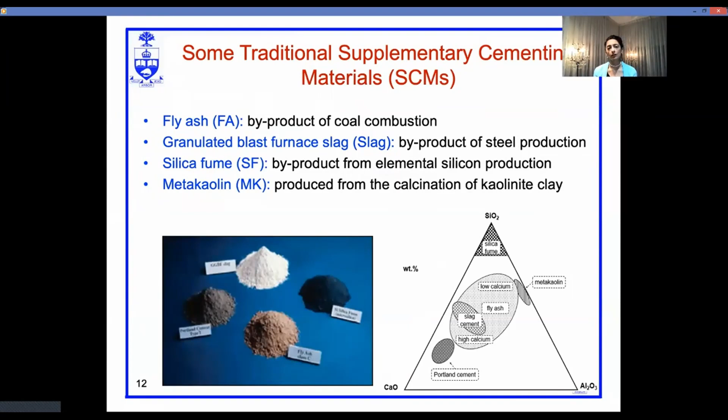These are predominantly industrial byproducts. Fly ash comes from coal combustion. Slag is a byproduct from the steel industry. Silica fume is a byproduct from elemental silicon production, etc.

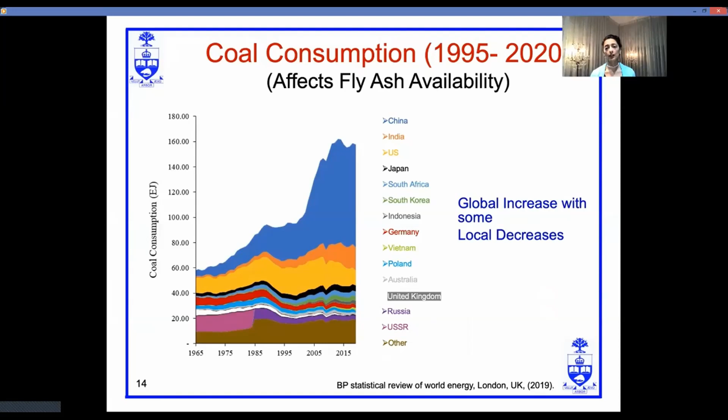If we look at coal consumption data from 1995 to 2020, we see that globally coal consumption is increasing, but regionally there could be some decreases. We also see this related to steel production. Globally, the value for steel production is increasing, but locally the production could be constant or even reduced over the past approximately 20 years.

That's exactly one of the challenges we faced in this collaborative project between IIT Roorkee and the University of Toronto. The main challenge was related to the use of fly ash being limited by local availability and high degrees of variability.

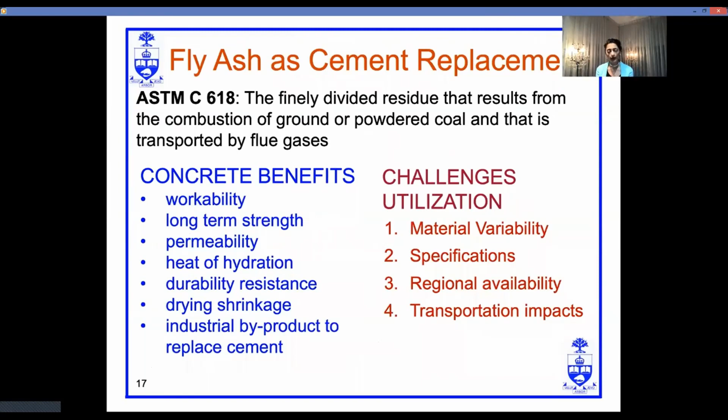So we wanted to evaluate the interplay between material properties, service life, and economic and environmental viability. Of course, as I mentioned, SCMs including fly ash have many benefits, but the challenges are what we want to address here, including impacts associated with transportation of this material.

The scenario in Canada versus India is very different. Canada is in the process of closing down coal-firing plants, so we do not have very much fly ash available for us to use as supplementary cementing material. In contrast, in India, there are projections for increasing construction of thermal power stations and therefore increasing fly ash generation.

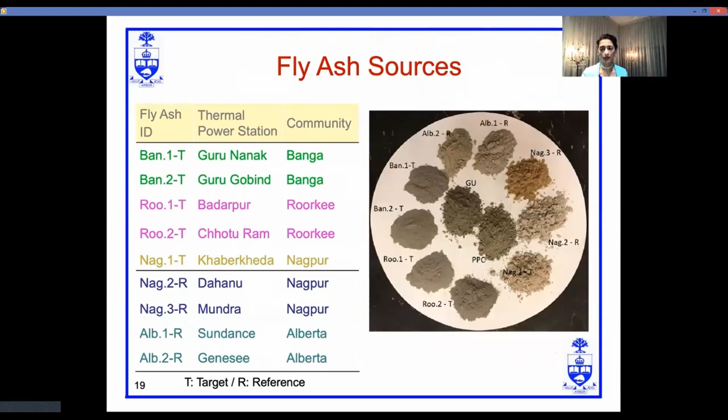Part of this project involved collecting fly ash from various communities in India and some reference fly ash in Canada. In Canada, our fly ash was collected from the two plants indicated on the screen from Western Canada. This slide shows the cities where we collected the Indian fly ash: in northern India from Banga, Roorkee, and in central India in Nagpur.

The basic framework for this research was to look at the engineering material properties, as well as an economic analysis and environmental impact, using a three-pronged approach to see how the benefits of the environmental and material properties would trade off related to the economic and environmental burdens associated with transportation of the materials.

In other words, very simplistically, we're using a three-pronged approach, the triple E approach, which is environment, economics, and engineering. Those we would say are the three pillars on which we can build.

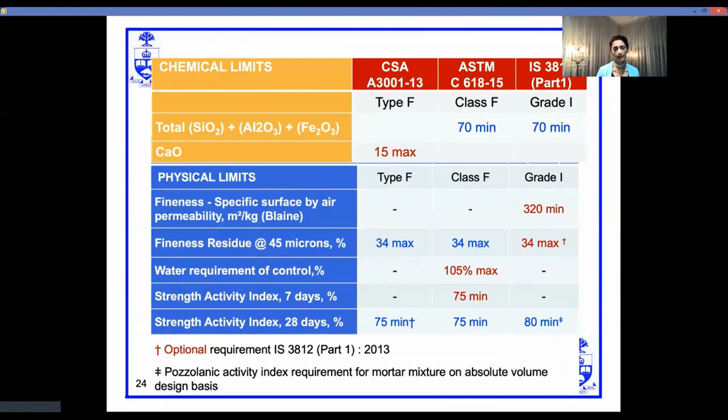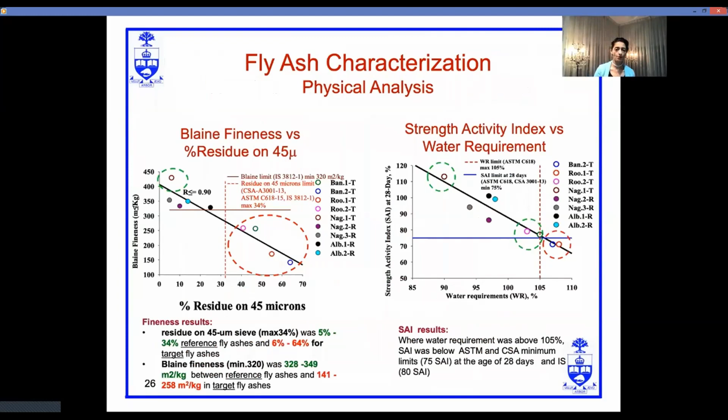We considered codes from Canada, the US (ASTM), and Indian standards to look at chemical and physical requirements. The chemical analysis, the oxide analysis by XRF for all 9 types of fly ash that we collected, met all of the chemical requirements from the 3 standards. The physical analysis was less straightforward. In some cases, some of the specimens failed the different code limits, so we needed to do some modification to the physical properties of the fly ash.

Beyond the actual material characterization itself, we looked at the concrete properties and performance, and what we found was that performance was very good at both 28 days and 90 days across all mixtures with different types of fly ash from the different communities. At 28 days, we had compressive strengths greater than 25 megapascals, and at 90 days, strengths greater than 40 MPa.

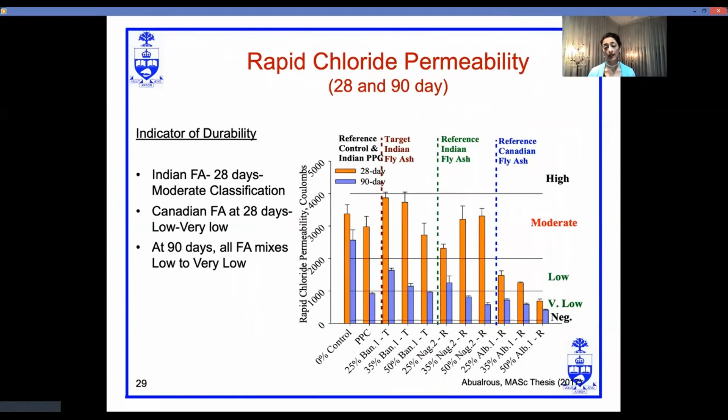Similarly, our rapid chloride permeability data was quite good. We had moderate RCPT at 28 days for the target fly ashes, and all within the low or very low range at 90 days. So that was considered to be quite good.

Once we had established our acceptable concrete material properties, we needed to look at economic viability, in the economic and environmental aspects. The indicator we're using here is the break-even distance, which is the maximum distance that fly ash can be transported without increasing the cost or climate impacts compared to the 100% general use scenario.

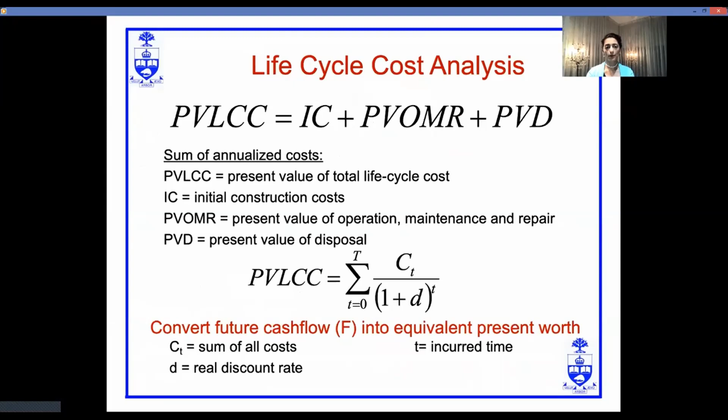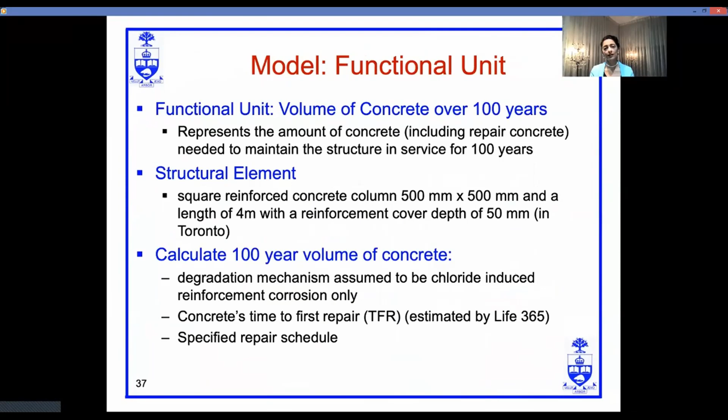Some more model details: the functional unit used in this study was the volume of concrete over the 100-year study period. Time to first repair was estimated using Life 365.

One of the key outcomes from this study is that there is a nonlinear correlation between the total volume of fly ash to be transported over a 100-year study period and the percentage of fly ash used as cement replacement. Some of those results are shown on the screen here.

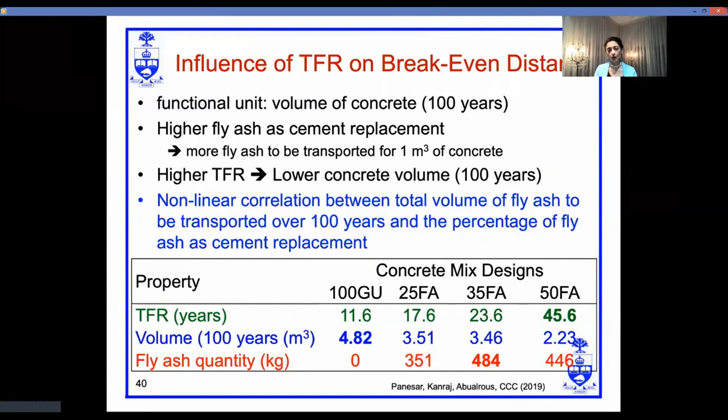This really emphasizes the need to look at this as three moving parts in the analysis, not just the concrete properties and durability performance, but also the economics and the environment, because transportation of this material over a certain distance will influence the cost and the environmental impact, and of course the fly ash controls the properties and performance.

I think I'm just meeting my time limit here, so I will make some final brief remarks: there is an urgency for responsible resource allocation, and as educators, researchers, and designers, we need to incorporate life cycle design and life cycle thinking into everything we do. A three-pronged framework of engineering, economics, and environment is a holistic approach.